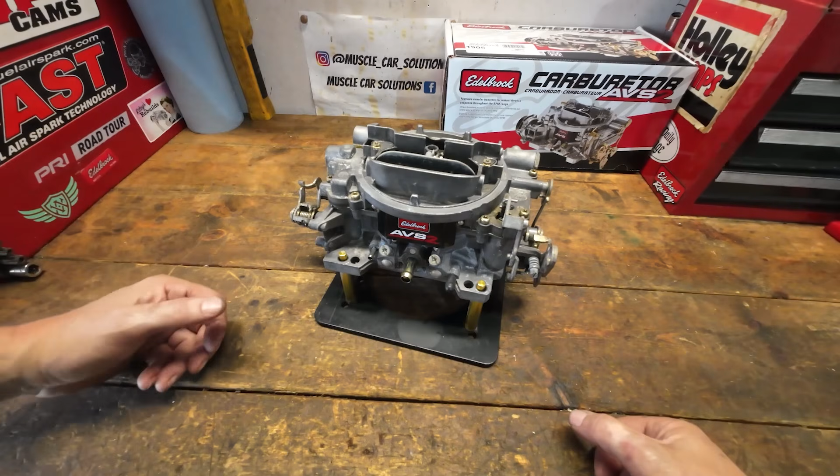Before we move out to the truck and talk about the setup process, there's a couple of things we need to cover first. And really, the big key thing is, what is tuning? Tuning is the calibration of a universal, in this case, carburetor, to an application that is unknown to the carburetor, and the two must be synced up so they operate properly together.

Now, that sounds like a really complicated deal, and it is a little bit more difficult, but fortunately, two things. One, these carburetors are very easy to tune, but also Edelbrock gives you the entire cheat sheet on how to do this. But before you even begin to turn a wrench, there's some things that you have to do to make sure that the carburetor is ready to accept the engine that it's going on, and that the carburetor will have the support that it needs to get the job done. So let's quickly talk about those.

Now, this is the carburetor that came off the engine. I had it on there for a different reason, to do a little bit of other testing. I will show you that in a different video, but essentially the same is going to happen whether it was this carburetor or a brand new carburetor like we're about to install in a minute. Now, before we jump out there, let's talk about some of the tools that you need to do this properly.

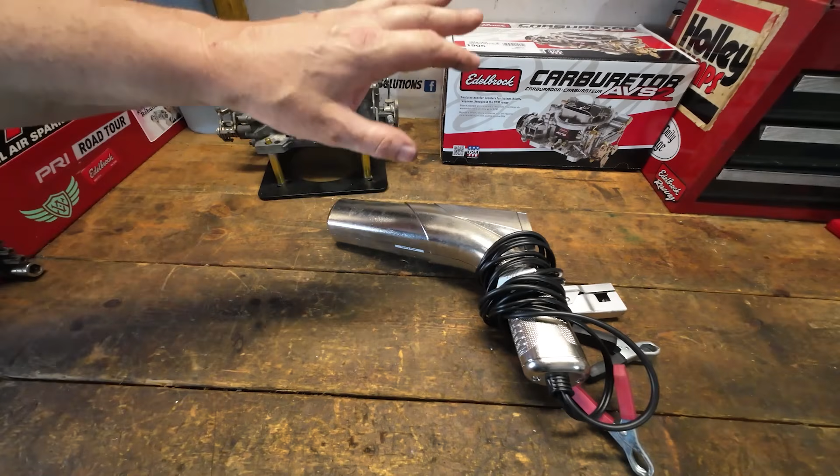The first is a timing light, and I know that sounds kind of funky because we're talking about a carburetor and working on a fuel system, but timing is the number one issue that most people have when swapping into a new carburetor or working on a new install and trying to figure out why the carburetor doesn't run right. The ignition system and ignition timing is one of the most neglected things when it comes to figuring out why a carburetor is or isn't running the way it should.

And it's one of the first questions that you'll see that I ask when people have tech questions about a carburetor issue that they're having. What is your initial timing set at, and what's the all-in? Those are critical to know, because if you answer, well, yeah, it's set right, give me a number. I need to know the number.

Typically, on an engine, small block Chevy like I'm working on here, now I'm fairly close to sea level. We're about 400 foot above sea level, if I remember correctly. And I start all of my engines at around 12 to 14 degrees before top dead center. Now, if you look back at the original spec for that small block that came in my 71 GMC truck, it's probably 6 to 8 degrees before top dead center. And if that's where you've got your timing set at, I am telling you it's not enough.

Today's fuel, because it has ethanol in it, is a little bit lesser quality than I think it probably was in the 80s, 70s, 60s, 50s, 40s, whatever you want to look at. And there's no lead in the fuel either. So you need a little bit more timing to start the burning process a little bit sooner. Timing fixes a lot of issues with these carburetors. So that is a big part of the initial setup: make sure you get the timing right.

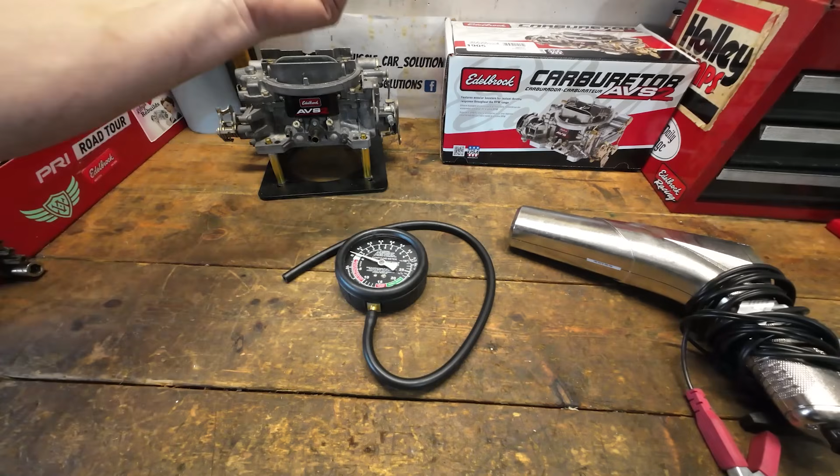The next thing you're going to need is a good vacuum gauge. Now, when we set the initial idle mixture screws and get all those dialed in, you're going to have both. This timing light has a tach on it, so I use it under hood instead of trying to go back and forth to the truck to read the tachometer and see what the engine RPM is. It's nice to have them both under the hood. Do whatever is best for you. For me, this works out well because I don't have to go anywhere.

I can look at the RPM, see what the gauge is reading for vacuum, and then set the idle mixture screws. Now, I did a really long 20-minute video on how to set idle mixture screws already. I will link that. We're not going to go through that step by step today, but it is certainly the process that we're going to work on. And if you want a more detailed video, you can go check that one out.

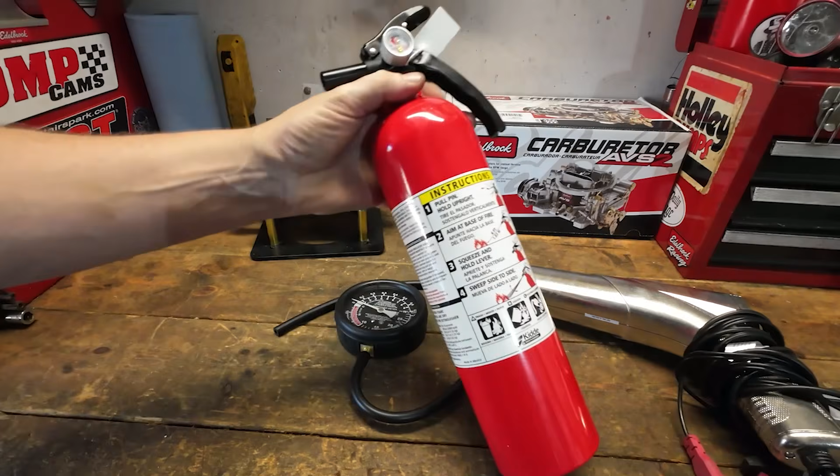And the last thing, well, I don't want to jinx you, but have a fire extinguisher handy. Yeah, I understand, but you're working with fuel. You're working in a situation where you're using a brand new carburetor. You don't know the situation. You are removing and reattaching fuel lines. You could have a leak somewhere. The last thing that you want to do is get into trouble and burn the whole thing down.

So play it safe. Have a fire extinguisher close by. I don't want to try to jinx you with it, but for sure, fortunately, a couple of times in my life, having a fire extinguisher close by has saved a vehicle and maybe saved a lot more. So just have one close by. It won't hurt you.

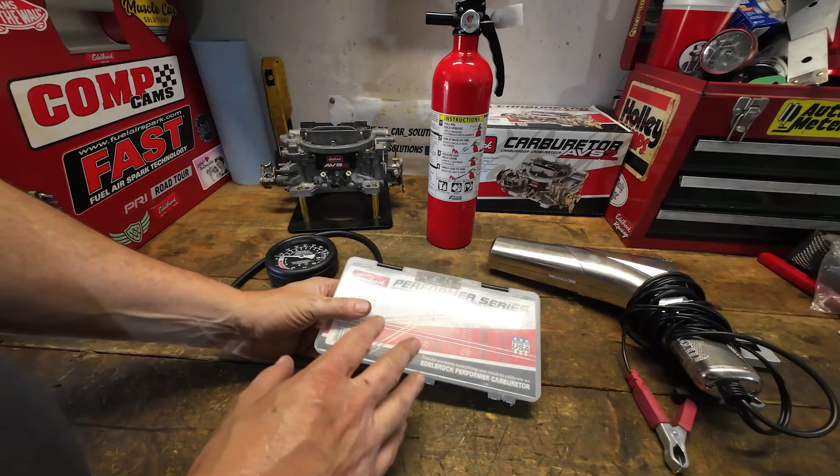The last thing you need to have is a calibration kit. Now, we're not going to talk about the actual tuning. This is just the initial setup of the carburetor, but you will need some pieces out of your calibration kit. So go ahead and order one now for the carburetor part number that you're working with, and that way you'll have the parts that you need to get this job done.

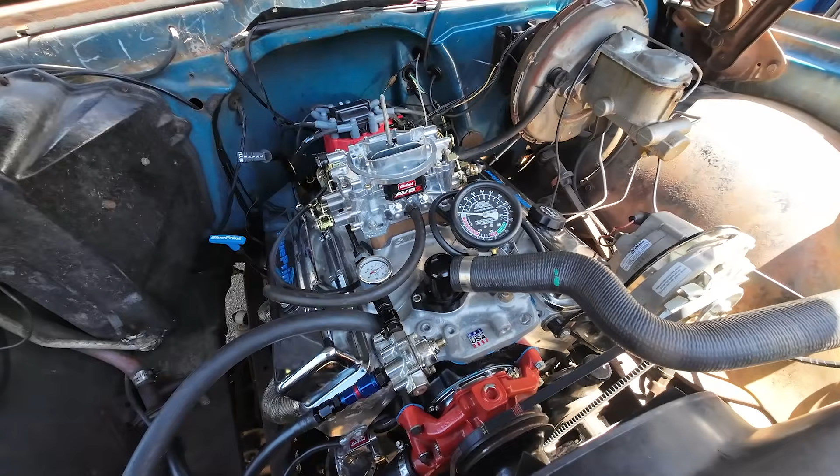So now that we got all that out of the way, let's go ahead and get the carburetor installed on the engine, and we'll start talking about the initial setup. So let's move out to the truck and we'll show you what's next. Initially, we're ready to go. So carburetor's bolted on. I'm not going to bore you with that. You guys have seen that 1,000 times.

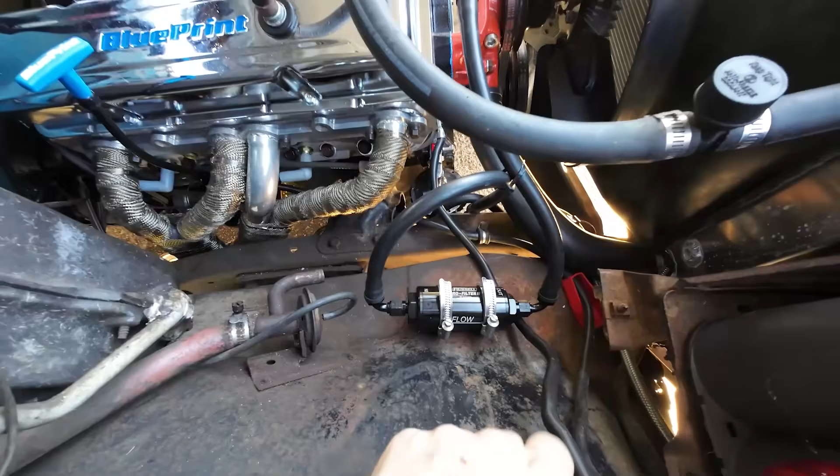Everything is hooked up. Now, I always run timed vacuum or ported vacuum on anything that's really stock, and this is a fairly mild cam. It's a little bit more aggressive, but we are going to try it in the ported or timed spot. For now, it's unhooked, distributor's unhooked, and I have my vacuum gauge hooked to full manifold vacuum. That's what we want. A big part of this, and again, a lot of the reasons why people fail, is getting the fuel system set up right.

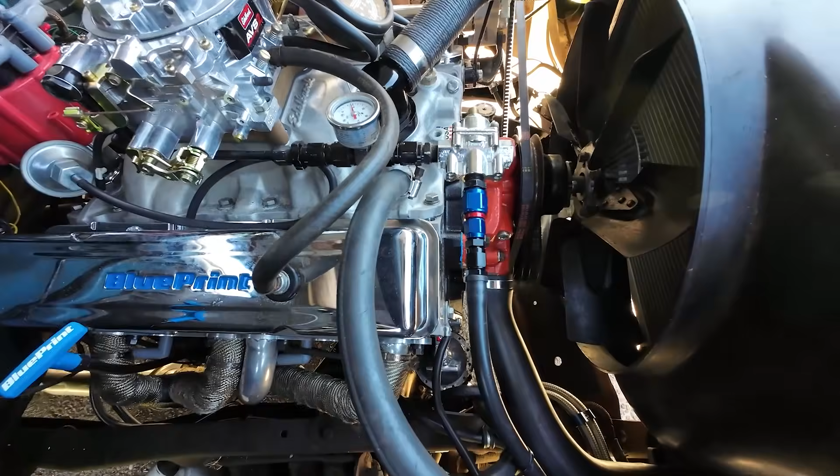Now, that is a brand new Edelbrock pump, something I decided to change and upgrade to. Puts out a little bit more pressure than the stock pump, but it's rated between, I think, 5 and 7 psi. Doesn't matter. I don't want you to get hung up on that. I don't care if it says it's rated from 3 to 6 or it's only rated at 6 psi. It's fixed. You always should run a pressure regulator. Doesn't matter what carburetor you're working on. Doesn't matter what the pump is set at. Always run that regulator. Give yourself one more adjustability point in a system that doesn't have a lot.

You've heard me talk about regulators a lot over the years, and you'd see it eventually if you do this on your own and you find a situation where you're pushing too much fuel through the carburetor, and then you realize, oh, I should probably get a regulator. Well, regulator is there to regulate flow. Pressure is a byproduct of that.

So if you want to watch that video, I'll leave a link to that one as well, but don't forget the regulator. Always run one. It's just an automatic. When you buy a carburetor, you need to have a regulator with it. Just keep that on your radar. So fuel system is very critical.

Now I'm using the brand new Russell Pro Filter 2 on here. I'm using this in a little bit different fashion. Typically I have this mounted on the frame rail, but I want this in an easier access point because I'm going to do some testing on how good a filter that is. We've already pressure tested and found out these do remarkably well for pressure drop, but the filter always goes before the regulator. The regulator is the last thing that the engine sees.

So again, I've done videos on how to set up a fuel system on my website. I've got downloads if you want to download a PDF of how I run a fuel system, but it is the best way to do it. The last thing the carburetor should see is a pressure regulator. Everything's filtered before that, so you're in good shape.

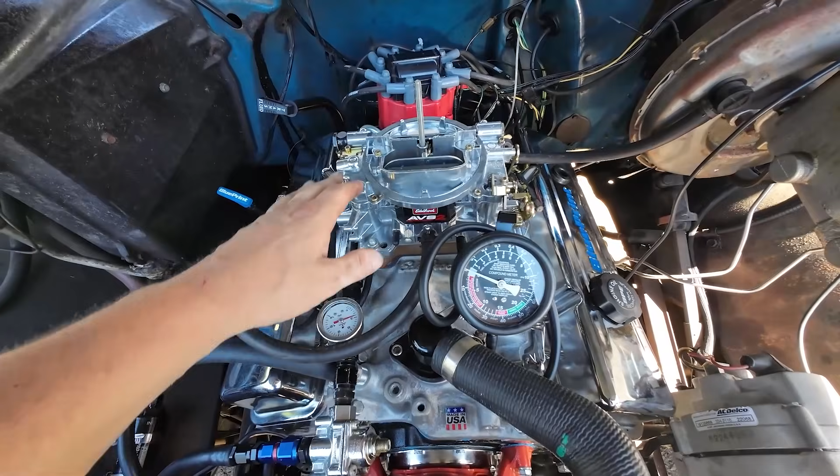Now this is a brand new carburetor, so what I didn't show you is before I installed it on here, I took the top off just to make sure and reset the floats. As these travel around, bounce around through the carrier, UPS, FedEx, however it gets delivered to your home, when it's set at the factory, it can change the float setting depending on how badly your freight carrier took care of your carburetor on the way in. So first thing is always to set the floats. Just re-verify that. Doesn't take that long. Gives you the opportunity to get in there and get working.

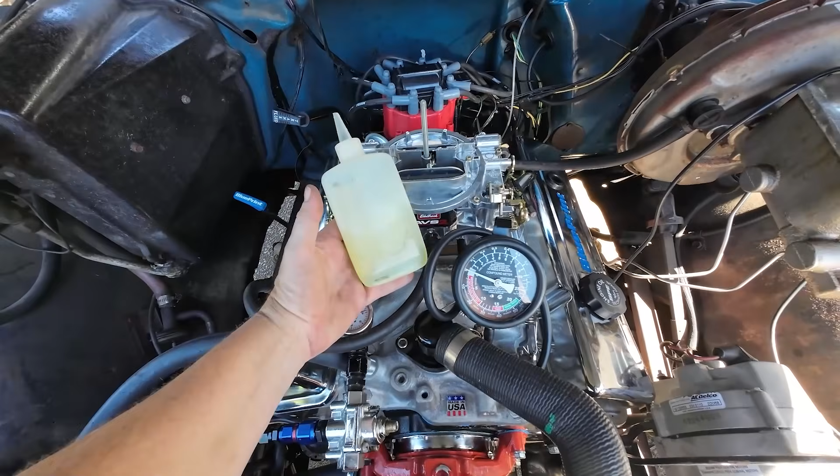Now because this is a new carburetor and we've never monkeyed with it before, you do need to prime it with a little bit of fuel. Now what I typically do is I'll fill up a little squirt bottle with a little fuel, and then what you can do is fill up through the vent holes right here.

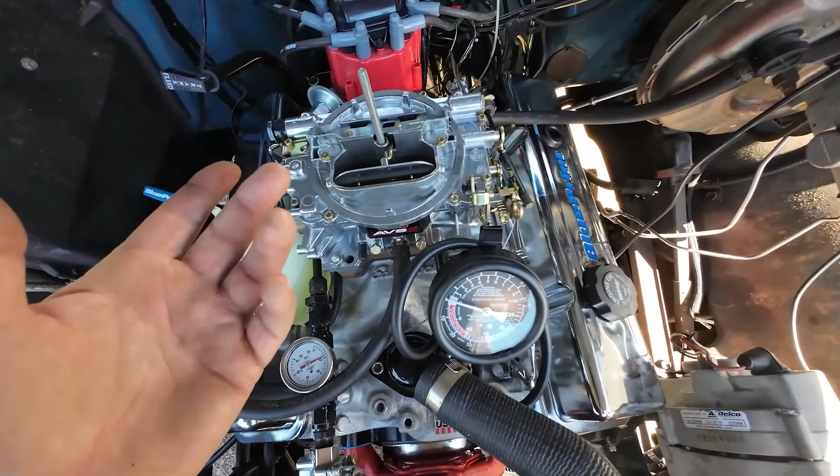You can fill up the bowls with fuel. Be careful with it. You don't want to overfill them, and you don't want to dump a lot of fuel down there. I know it's really popular. You've seen about 1,000 videos, but just a couple of drops down there is all you need.

I've already pre-filled these, and then all we're going to do is drop a few drops down in there, and what we're going to do is check for leaks once we get started up, start looking at the vacuum, and then we can determine what step-up springs we're going to use. That's going to be our first step here in setting the initial setup of this carburetor, is to get the step-up springs right based on how much engine vacuum this thing produces.

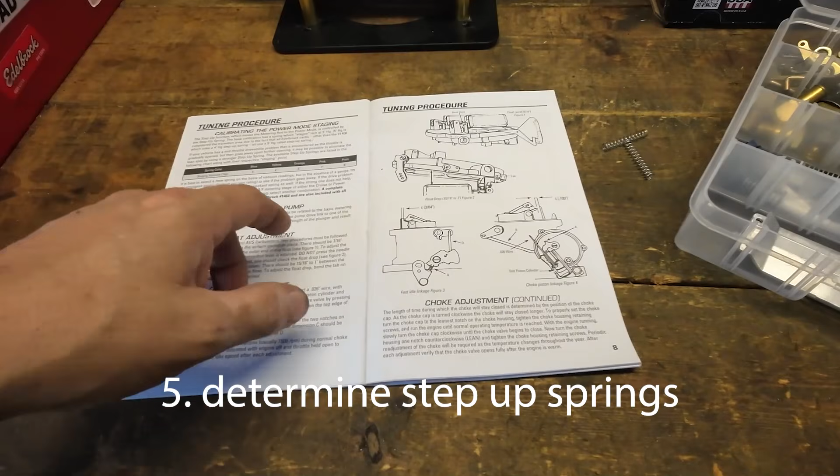So now that we've got the vacuum where we wanted it, where it idles good, we need to make a step-up spring change. So the 1905, I know, comes with the orange spring in it. And if you see, that's rated at a 5-inch spring. Double it means it's around 10. That's a really good average spring to use, but I'm going to follow the way that the tuning chart works, and I'm going to follow it by the book. We'll see how well we can tune it.

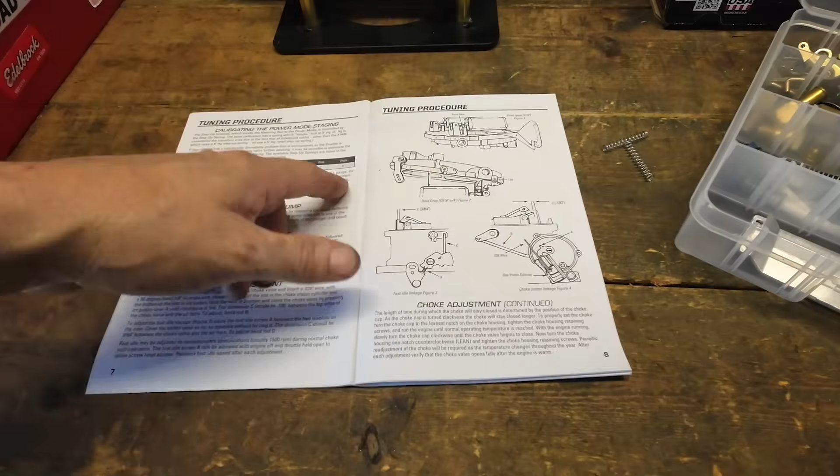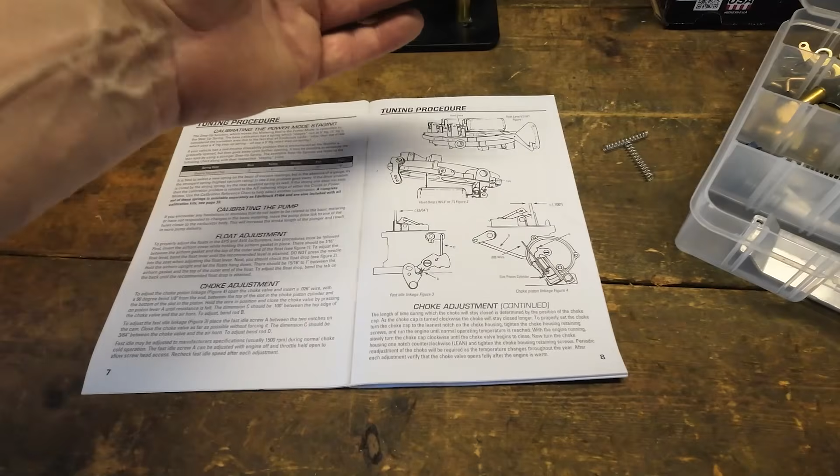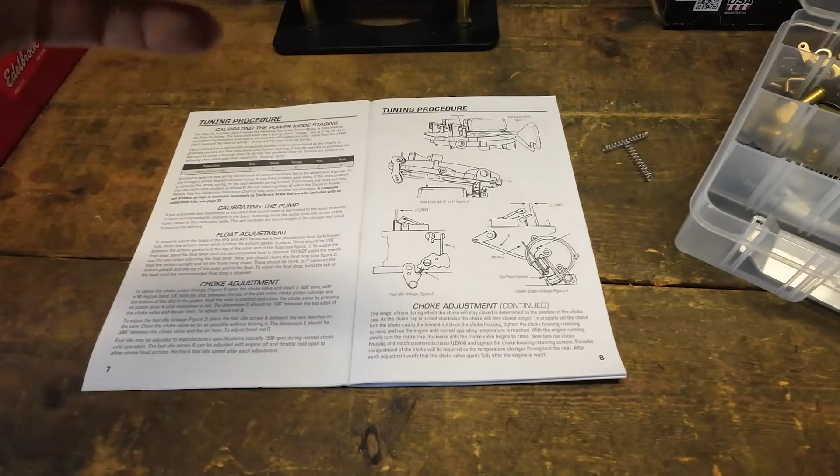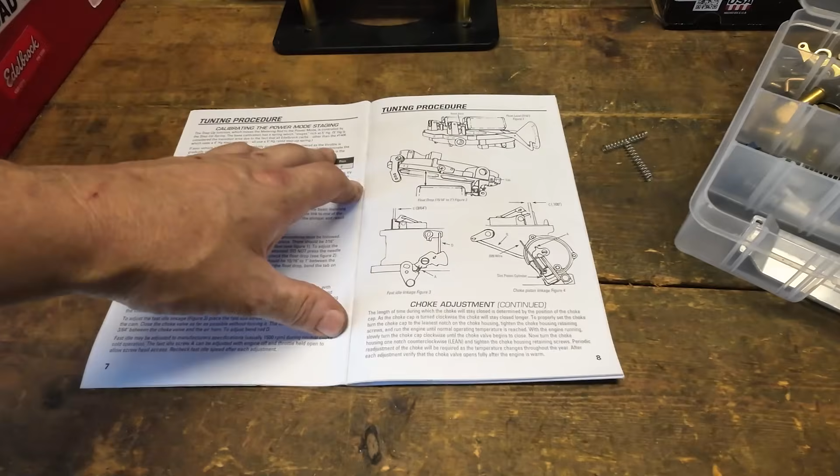The plain springs are the 8-inch springs, which will put us up to an opening of the main metering circuit, or full fuel flow, at around 16 inches of vacuum. When the manifold vacuum starts to drop from 20 down to 19, 18, 16, then it will release that spring, open it up. It is to help you transition from a leaner condition, less fuel, into more wide open throttle, or into a throttle position that's a little bit more open. And when you meter through the main metering circuit, the rods and jets and the step-up springs help do that.

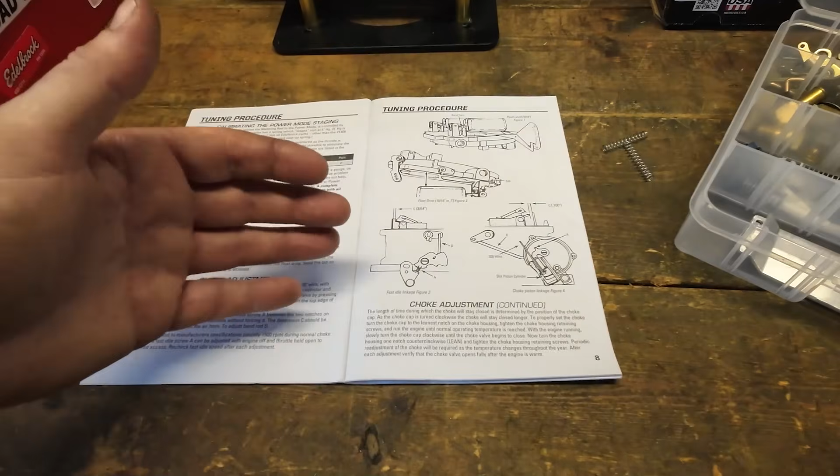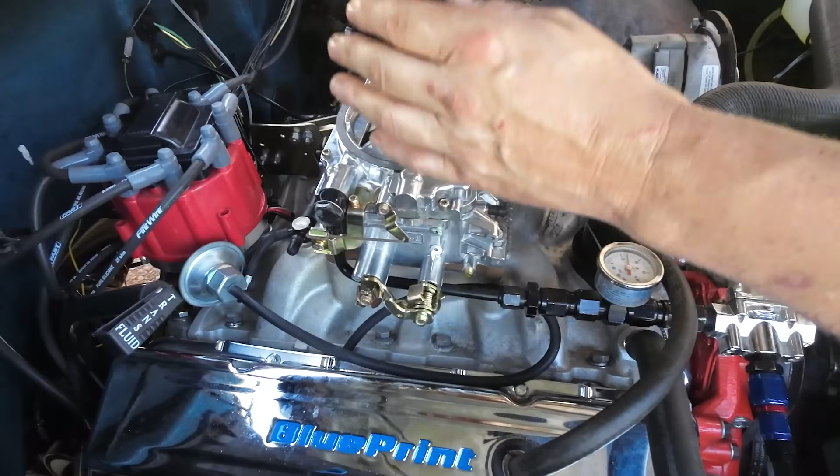So this is another step in your initial setup of this carburetor. We're just talking about the basics here. We still haven't done any tuning at all. This is just setup. So let's go get those silver springs in. And there's the orange spring that we're going to replace. And the plain spring is going in.

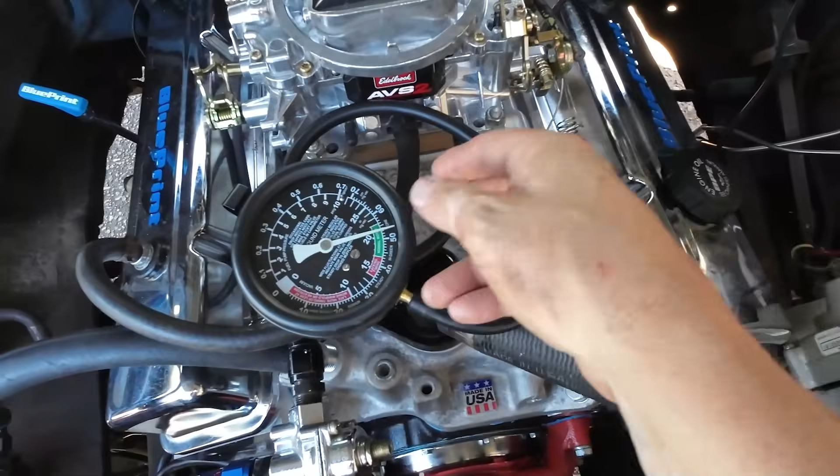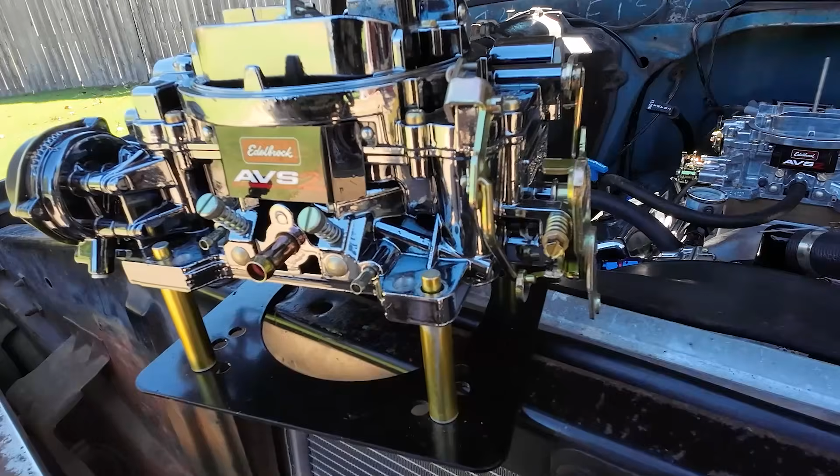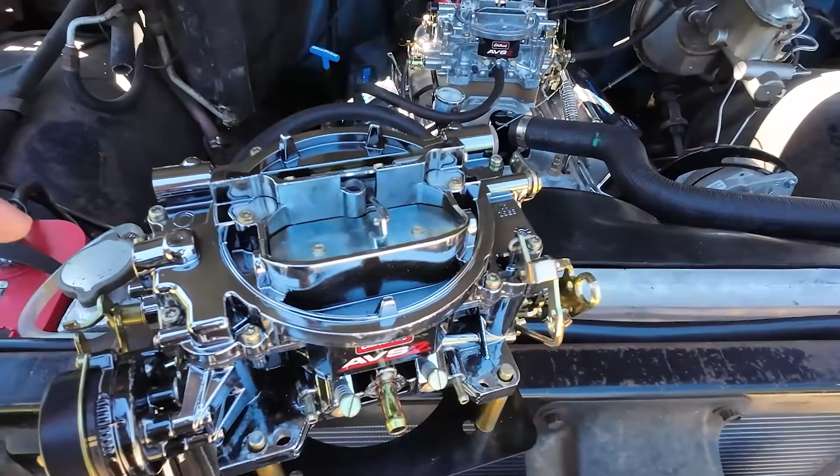One last little detail is the fast idle speed. Now, this is an electric choke carburetor. Obviously, we're on a mechanical choke on the engine now, so we didn't really cover too much of it. But if you're on an electric choke carburetor, setting the choke is part of the initial setup, and the fast idle speed. So same thing with anything else, just make sure the choke is set completely. That way you can get up on that adjustment pretty easy. Better to do when the engine's cold, not when it's running, but something we didn't talk about, but figured we need to throw that in there.

And that's it, you're set. Initially, this carburetor is set up to begin driving and start tuning. Now, we are nowhere near tuned for this engine, but what we are ready to do is to start that process. So, idle mixture screws, idle speed, step-up springs, ignition timing, all parts of the initial setup. So don't get it confused. If you've done those things, great, you're ready to start tuning, but you have not tuned that carburetor yet.

That is an untuned carburetor, it has no idea what it's working on. All it does know is what kind of engine vacuum we're drawing and how the idle mixture screws need to be set up. So we're good to go. We're ready to begin the process.